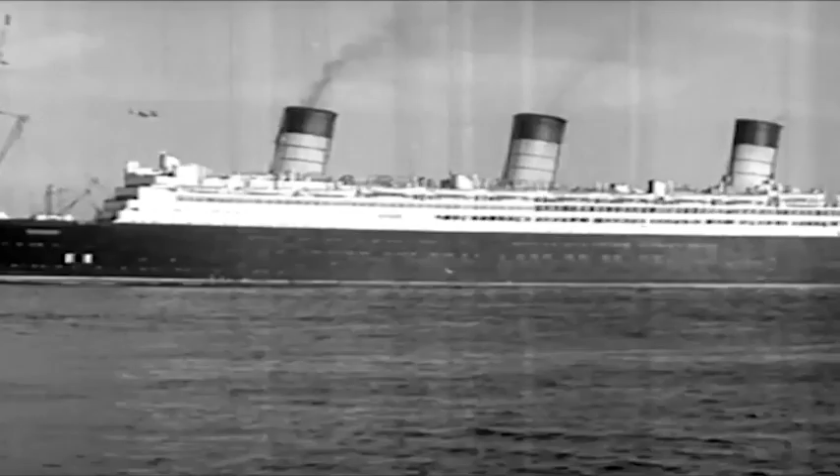The flash of power, the gleam of oil. In the sky, the power of oil conquering the heights. On the sea, the might of petroleum pulsing in great engines of the liners that traverse the deep. On land, oil feeds the fiery furnace or drives the diesel engines along far-flung rails of steel. And on the open road, well, you know what makes your auto run.

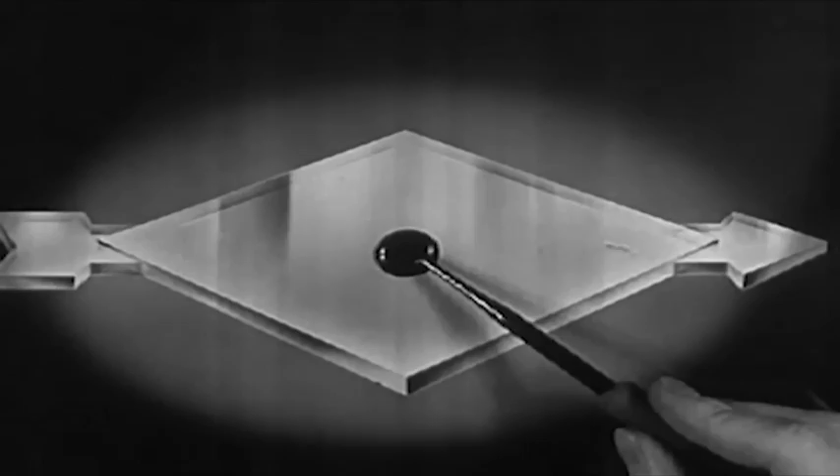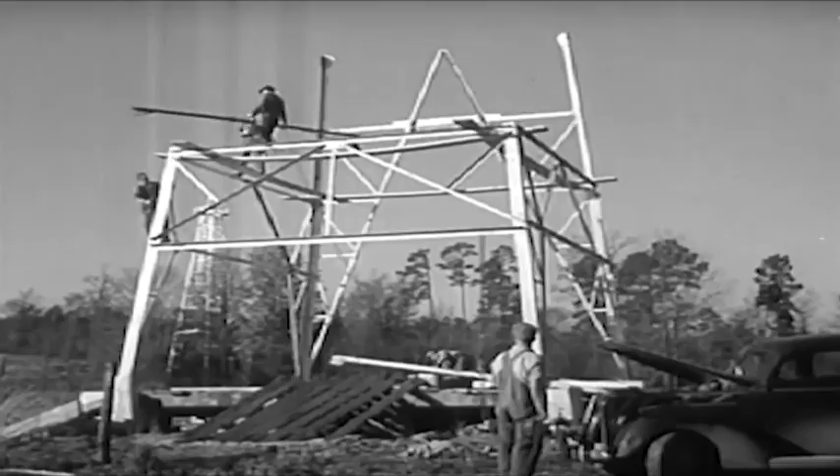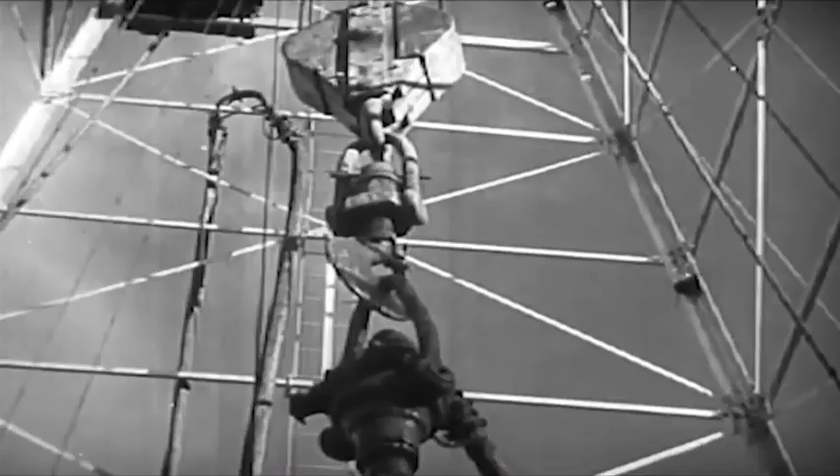For millions of years, this source of power slept peacefully in the dark recesses of the earth until modern magic loosed the liquid energy from its subterranean prison. Great areas became forests of towering derricks. And here's how the petroleum forest grows. A cellar is dug, and a rotary table to turn the drilling stem and the bit is set in place. Round and round the rotary goes, drilling deep down to oil.

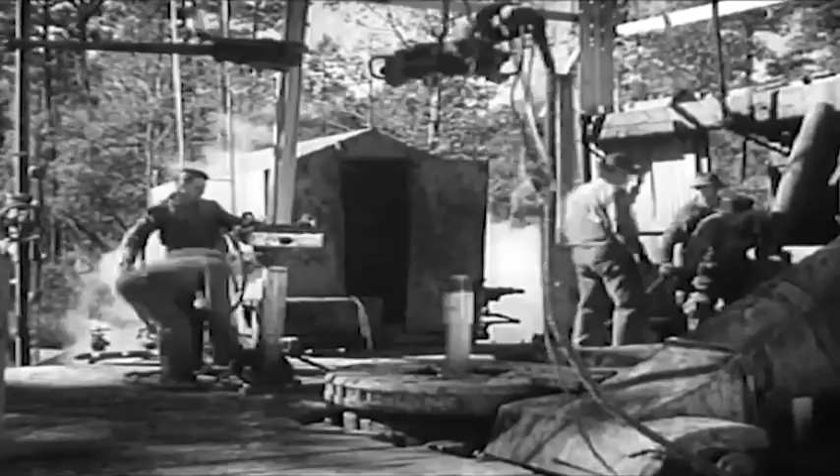A steam engine drives the drilling mechanism. They're inserting a length of pipe, lengthening out the stem for deeper drilling. A new joint is waiting. Oil field workers are called drillers, roughnecks, roustabouts, rope chokers. The oil field treats our ears to odd and colorful names. Now the drilling stem has been lengthened. Then round and round once more.

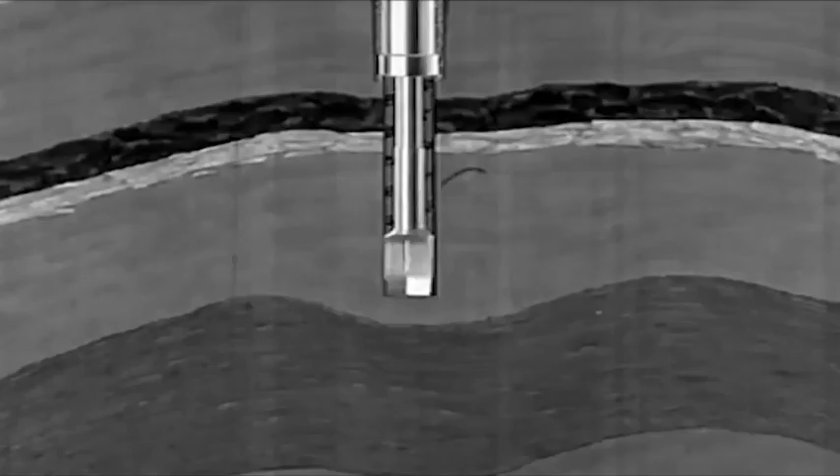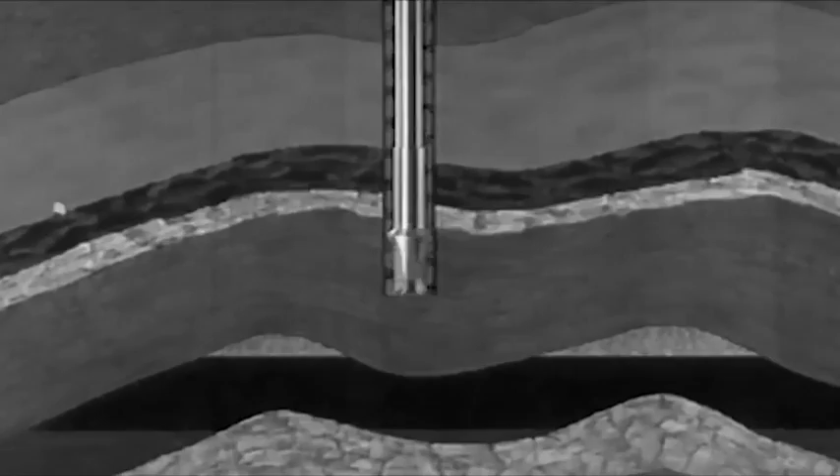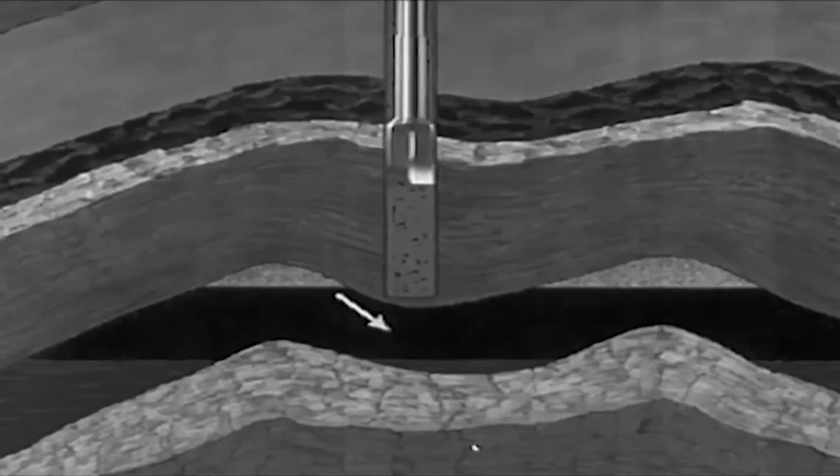Down through layers of sandstone, shale, limestone, down to astonishing depths. This well 5,000 feet. Some 10,000, 2 miles into the earth. And then, after weeks of drilling, fighting against natural obstacles, the drill at last reaches the oil sand, porous rock, which holds the oil much as a sponge holds water.

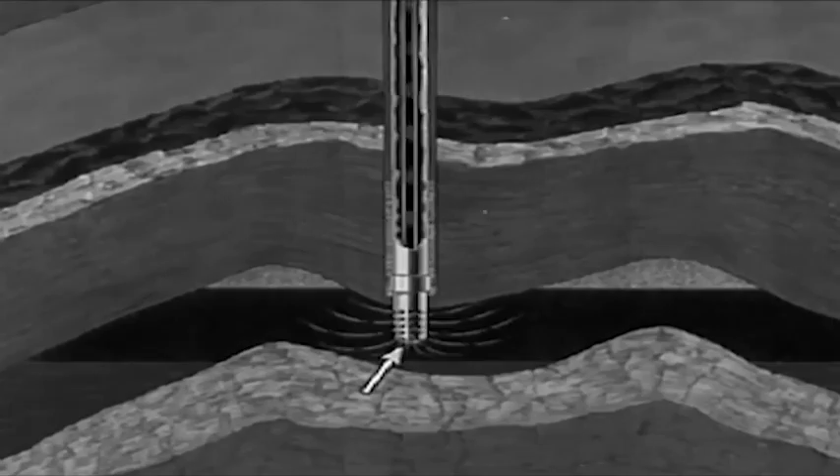Next, the casing is lowered to the bottom of the hole and cemented in position. Then drilled through the oil sand, and a screen is installed at the base of the casing. The screen extends down into the oil sand. The oil flows through the screen, up through the small pipe tubing to the surface. So they've struck oil. And now the well must be cleaned of the mixture of drill mud and oil.

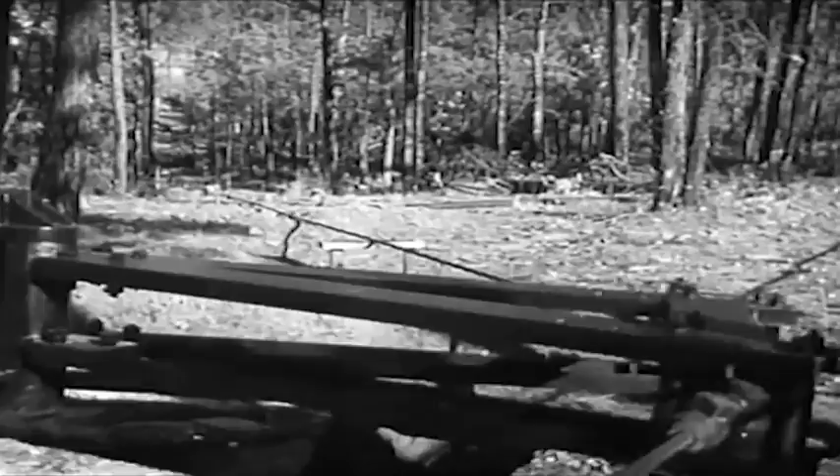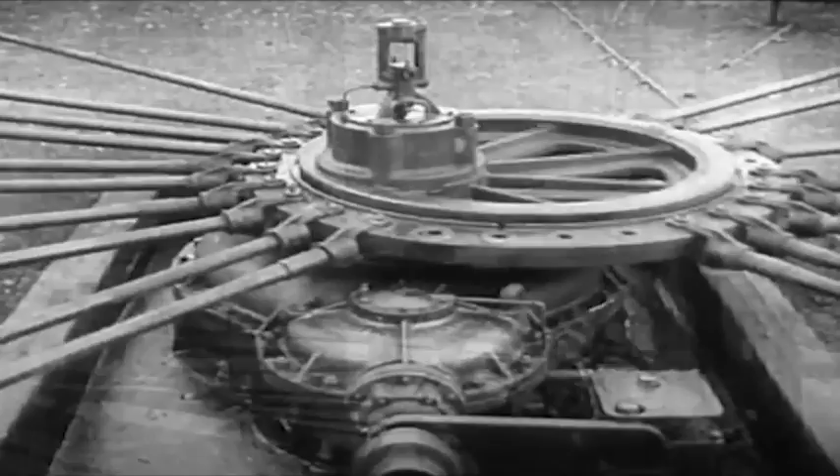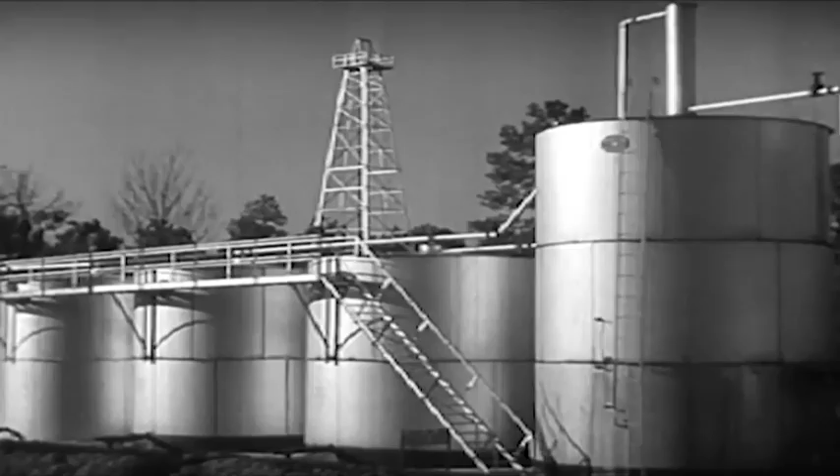Some wells flow of their own pressure. Others must be pumped, need power. The power is transmitted to groups of wells. The ever-swaying rocker arm, the rhythm of pumping, the unceasing heartbeat of the oil fields. A 24-well hookup is the height of oil field power. Pumping black magic from 24 drillings in the earth, all at the same time, out of the ground. The oil is cleaned of natural gas or water, which is combined with it.

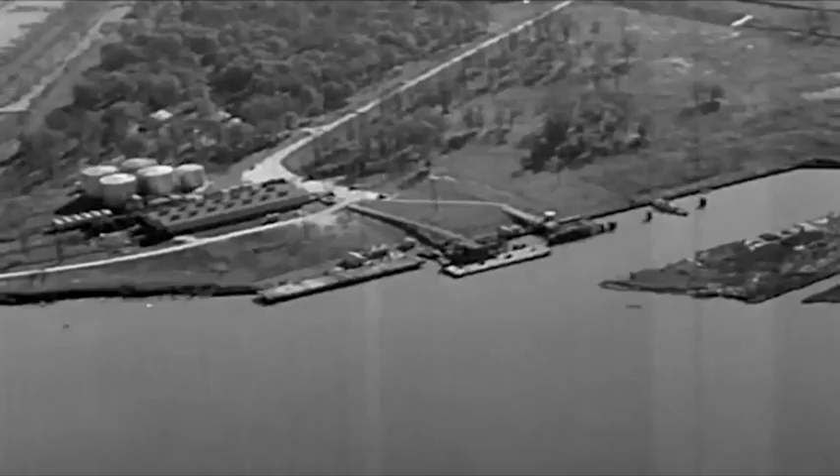Next, the petroleum starts on its way through a great network of pipelines. There are powerful pumping stations every 40 or 50 miles to keep it moving along the lines. The lines of pipe, alive with racing oil, run through forests and over plains to these silver discs. They're storage tanks where the oil rests briefly before it rides the waves in giant tankers. And they're masterpieces of shipbuilding, those tankers of steel. The largest navigate the sea at 15 knots and carry 5.5 million gallons of oil. The voyage of oil to the refineries.

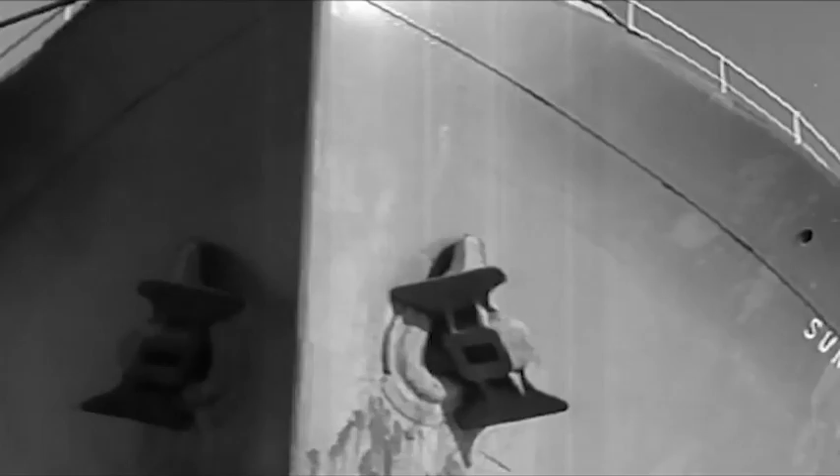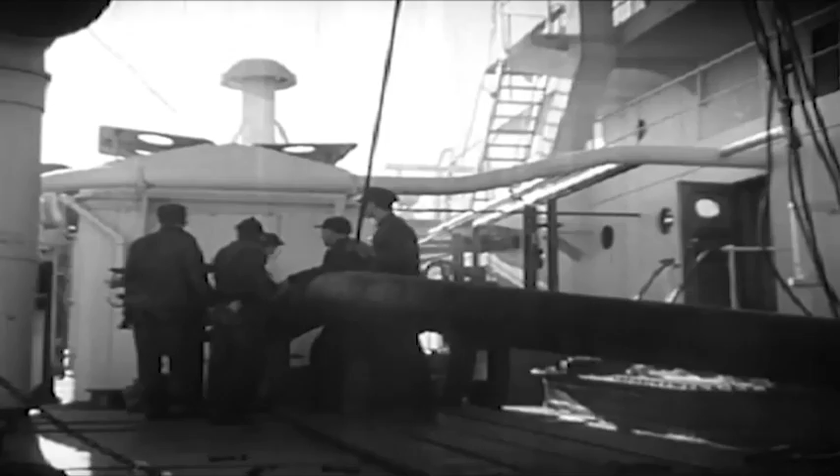The refinery with its modern structures, technological towers, minarets of science, docks, office buildings, pageant of industry. Day after day, there is an endless flow of oil as the tankers discharge their liquid cargo. Unloading oil is a vast operation of piping through huge hoses. Discharge pipes on the vessel and receiving lines on the dock are connected, and a cargo of 5 million gallons is discharged in less than 24 hours.

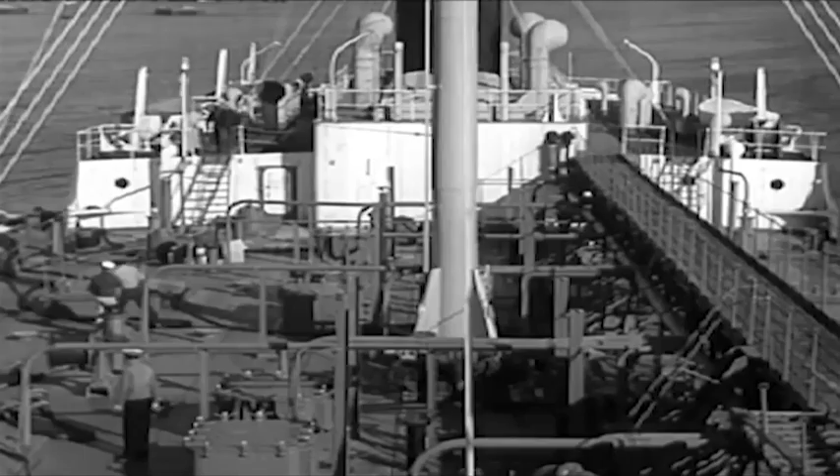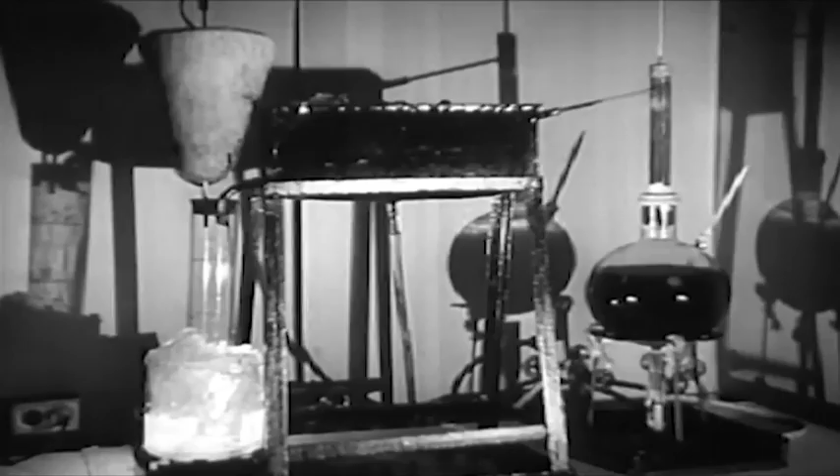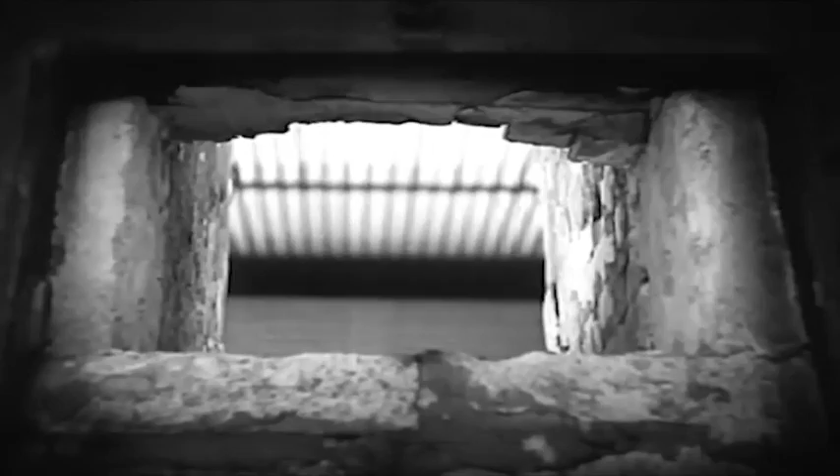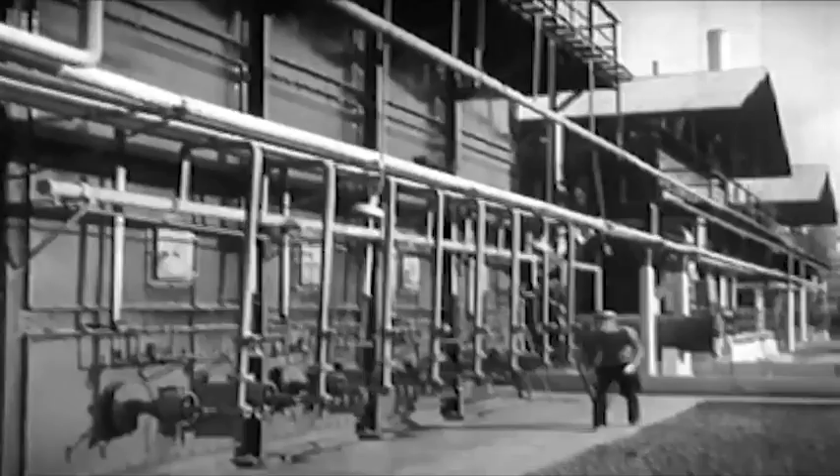No two cargoes of crude oil are alike, so each boatload must be stored in different tanks, and each batch must be processed individually, with laboratory tests to indicate the precise treatment for each. That is embodied science. Those masses of strangely wrought steel, forests of stacks, glowering and hissing boilers, leaping and winking fireboxes. Intense heat, the flames roar in the furnace, yet the oil flows so fast the heat does not scorch it. And scientists wrest from the crude petroleum its tremendous power in the form of gasoline and other fuel oils.

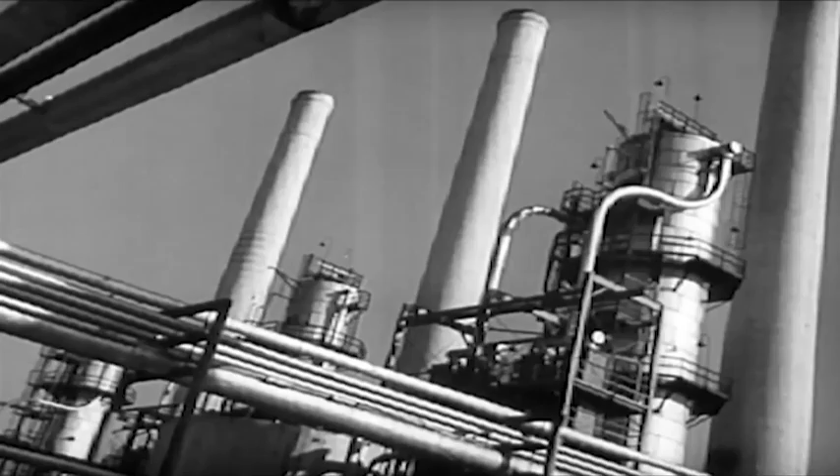And that's done in these towers called fractionating towers. They divide crude oil into the lighter and heavier parts. Those of different boiling points liquefy at different levels in the towers. Some lighter than gasoline liquefy at the top. Heavier parts liquefy further down. At the bottom are the heavy fuel oils, or the raw materials from which lubricating oils are made.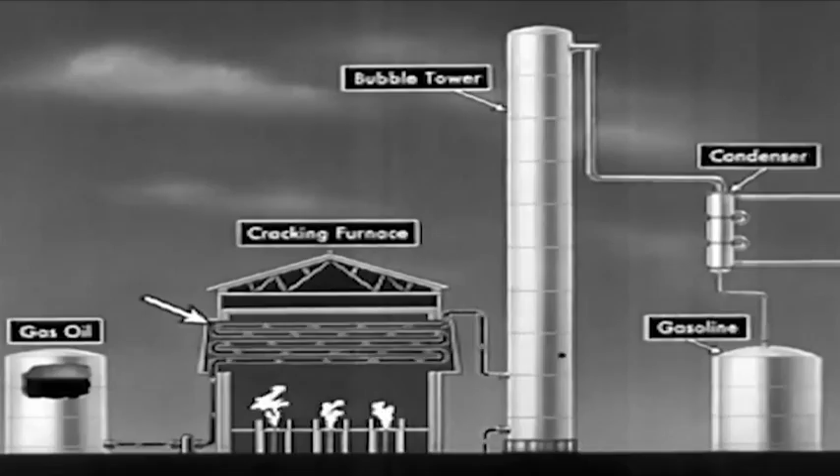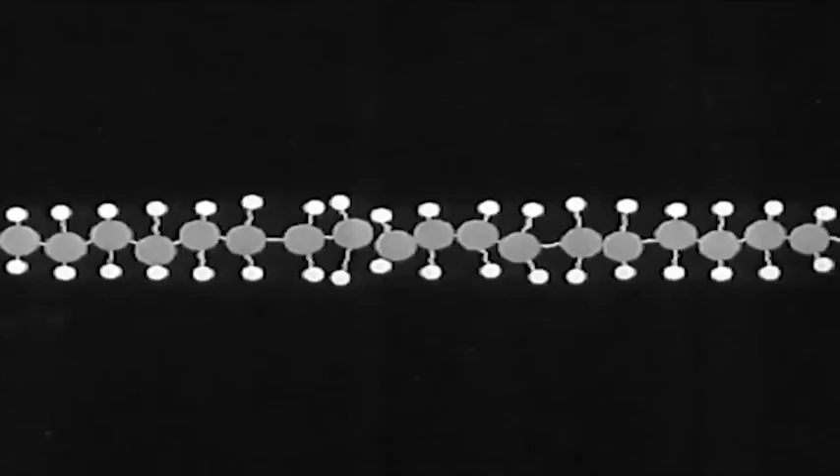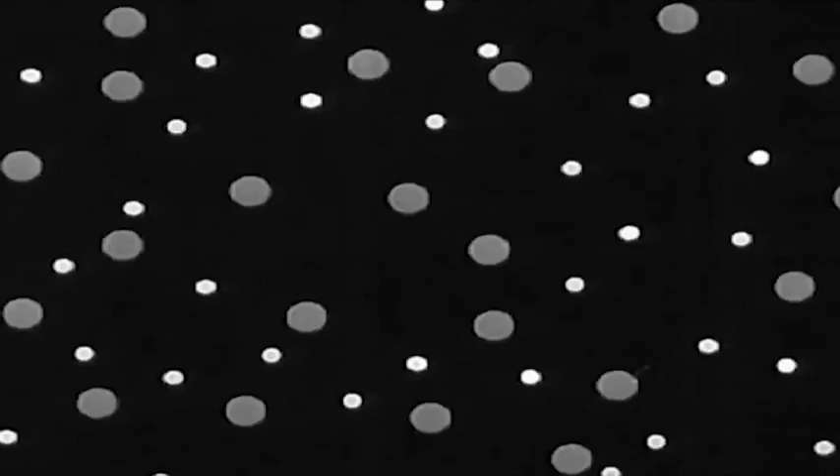Called gas oil, it is pumped through a pipe into a cracking furnace, heated to over 900 degrees under tremendous pressure. And the individual particles, molecules, are broken into smaller molecules, just as coal is broken under a hammer. If we could see one of those molecules, it would look something like this. The hotter the molecule gets, the faster it wiggles, until finally it wiggles so fast it flies apart. The pieces shoot around at great speeds. They eventually find partners and form new and smaller molecules that look something like this. These smaller molecules are now no longer gas oil, but are gasoline of high-powered, knockless quality.

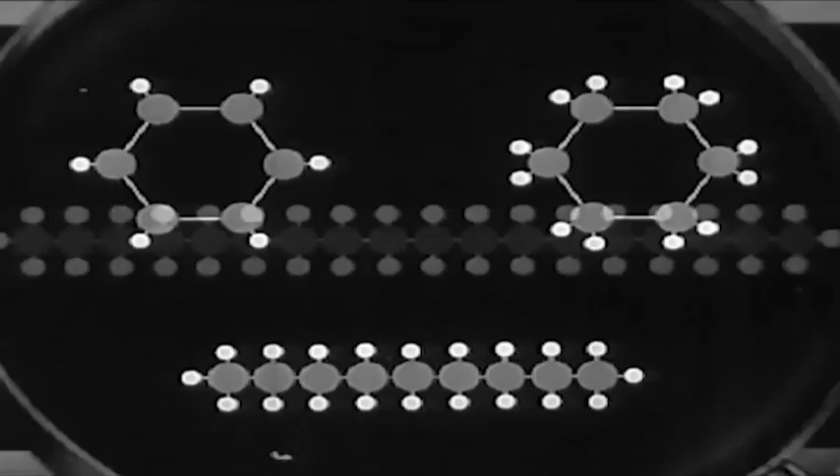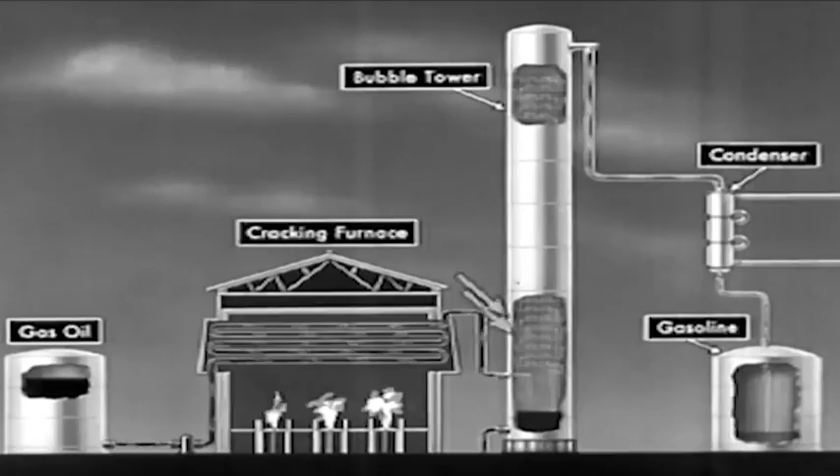Some of the gas oil molecules do not fly apart and must be separated from the gasoline. This is done in the bubble tower. Here the big molecules, which are not gasoline, are held back and come out at the bottom as a liquid. The gasoline goes up the tower as a vapor, comes out at the top, and is condensed into liquid gasoline. Gasoline that gives more power to you.

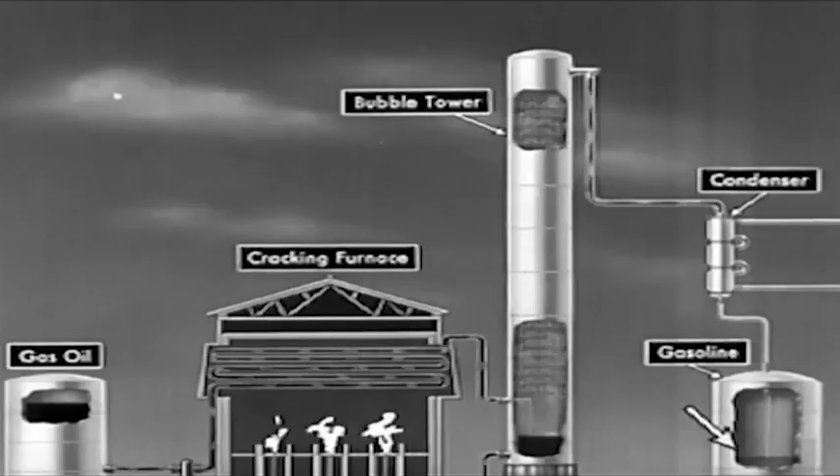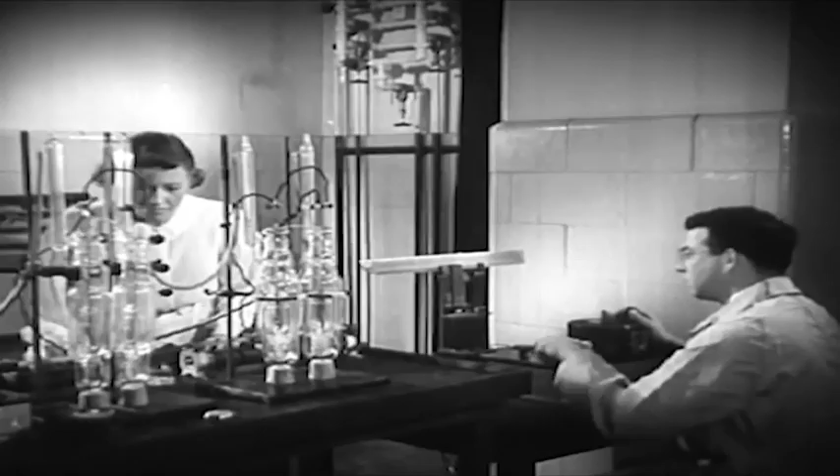Experiment is the key to it all, and this is the experimental laboratory. In the making of powerful motor fuel, the control of temperatures is of extreme importance, and it is measured to an accuracy of 1/100th part of 1 degree. Gasoline is broken down into over 200 parts in that elongated tallness of glass, and each individual part is studied. The laboratory with its strange gleaming of new and unpredictable things. Here are created modern miracles with the chemistry of oil.

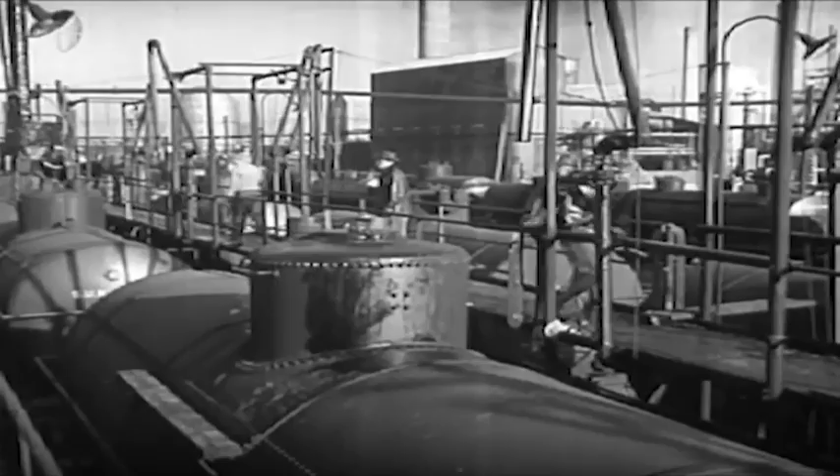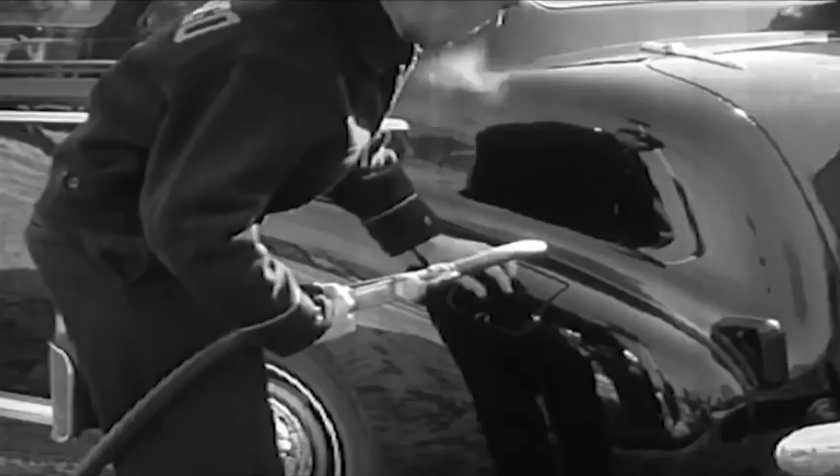Tank farm, to which the motor fuel goes from the refinery, and then out to the nation, by railroad tank car and by motor barge. Pipelines run their web-like nets under rivers, over mountains, carrying gasoline that goes into millions of gasoline tanks to generate billions of horsepower for the nation. Oil means horsepower in a horsepower-using world. Briefly, in 4 words, more power to you.